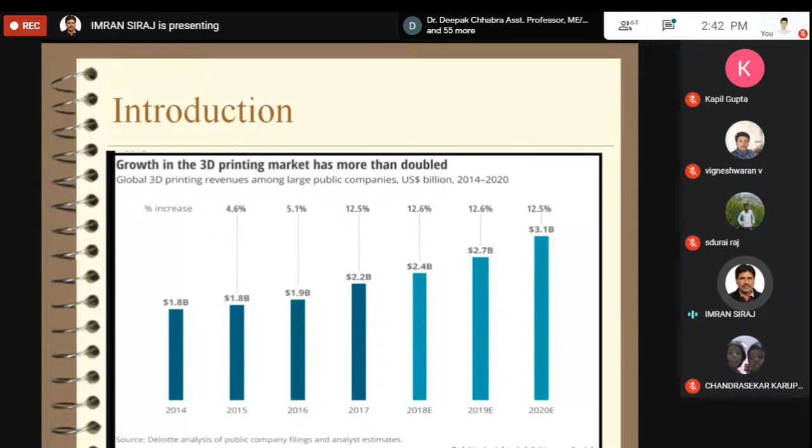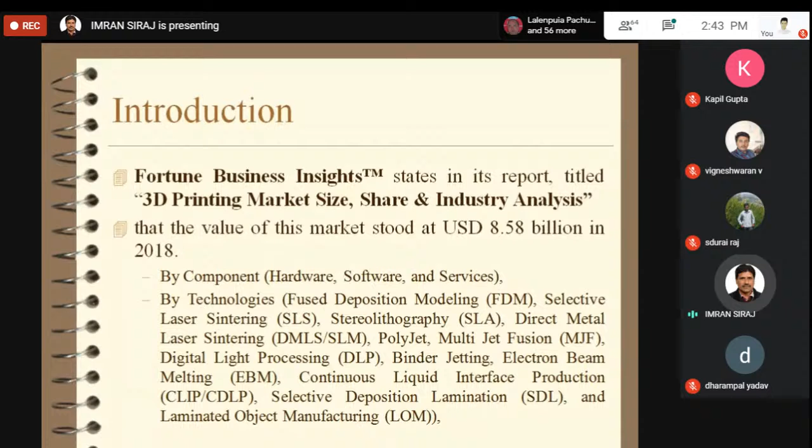Coming to some other reliable sources, another 3D printing market outlook. The predictions are for the next 5 years. We started from 1.8 billion in the year 2014, and now in 2020, by the next 5 years we are expected to reach 8.58 billion US dollars. The whole market scenario would be close to $8.58 billion. This was 3D printing market size, share, and industry analysis, Fortune Business Insights trademark report. They are a giant in this field, and their reports are very reliable and close to reality.

So they are also saying that 8.58 billion is the market value, and by the year 2025, we would be having around $44,393.1 million. That is, we are predicting by the year 2025, we would have this much amount involved for all 3D printing activities. They also told that North America was the highest contributor to the global 3D printing market, with a net worth of $1,728.1 million in 2014, estimated to reach $16,838.3 million within 5 years, registering a compounded annual growth rate of 20.8% during the forecast period.

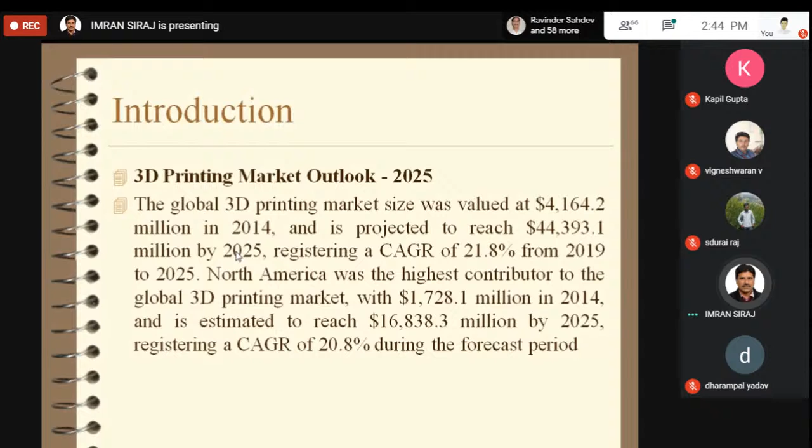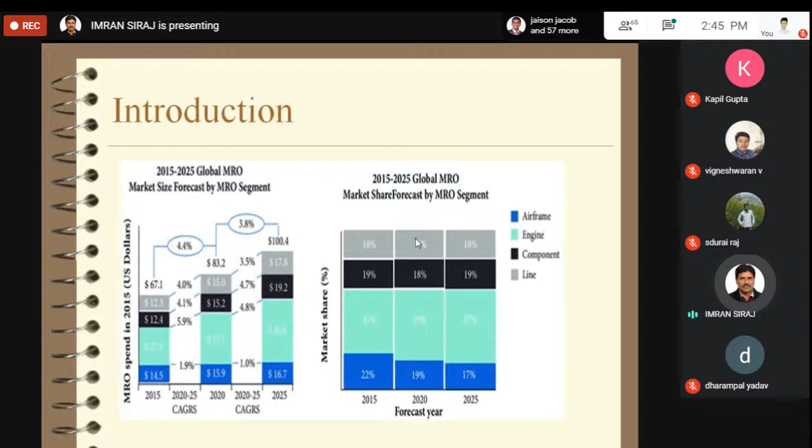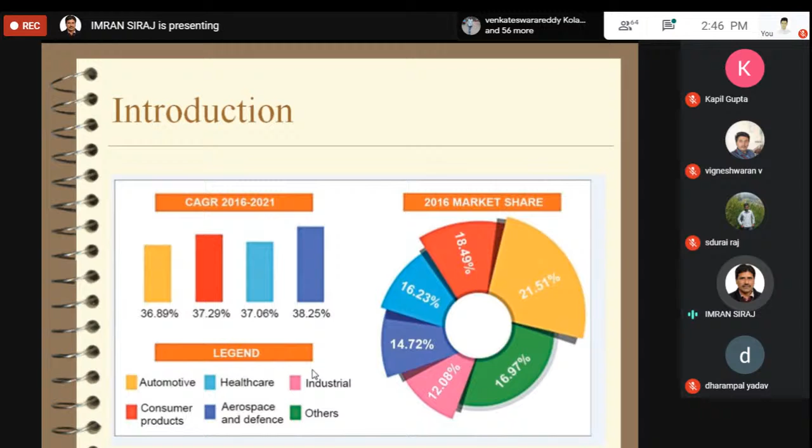Then we have compounded annual growth rate between 2016 to 2021. This is the cumulative compounded growth rate: 36%, 36.89 to 37.29, 37.06, and 38.25. And this is the market share: 12.08%, 14.7%, 16.23%, 18.49%, 21.5%, and 16.9%, for automotive, consumer products, healthcare, aerospace and defense, industrial, and other. I would like to mention this data: 12.08 for the industrial sector. The application of 3D printing in the industrial sector is quite low, which I'll be discussing today.

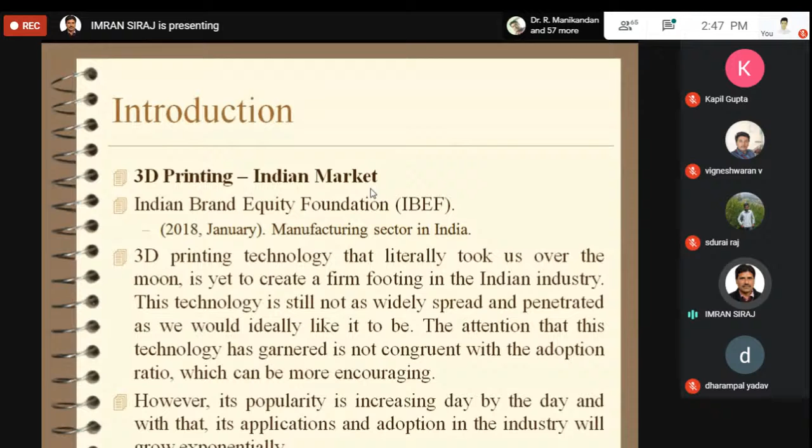Coming to the Indian context, we have the Indian Brand Equity Foundation, IBEF, and in their report published in 2018, they discussed the manufacturing sector in India. They said that 3D printing technology, which literally took us over the moon, is yet to create a firm footing in Indian industry. This technology is still not as widely spread and penetrated as we would ideally like it to be. The attention this technology has garnered is not congruent with the adoption ratio, which could be more encouraging. However, its popularity is increasing day by day, and with that, its application and adoption in industry will grow exponentially. This is from the Indian Brand Equity Foundation, the most reliable source for financial inclusion and calculations as far as the Indian market is concerned.

Now, another research analysis wing, 6W Research, also concerned with the financial status of all sectors in India, has indicated in their report that by 2021, the 3D printing market in India is estimated to touch $79 million, with focus on optimizing cost and quality of production, shorter development cycle times, and adopting engineering and manufacturing approaches. 6W Research has also indicated that 3D printing is yet to become a natural choice for industries to invest in to retain their competitive edge. I have highlighted this whole sentence, and it is going to be the pretext of my talk: 3D printing is yet to become a natural choice for industry to invest in to retain their competitive edge. This will increase the penetration of this technology across various industry verticals.

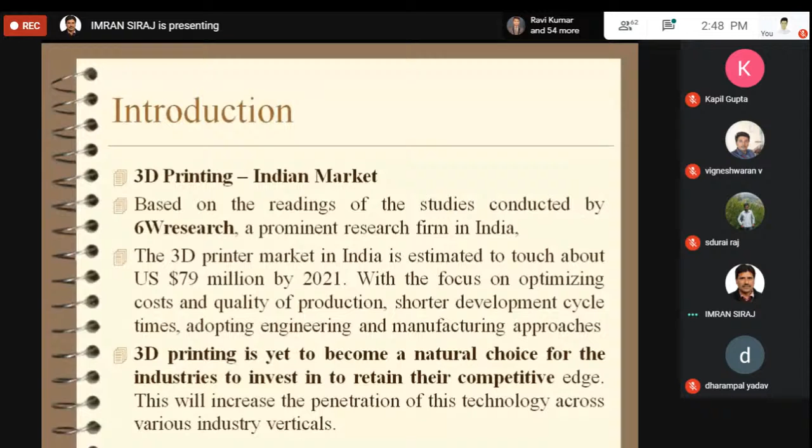Currently, the use of 3D printing in India is restricted to conventional applications such as prototyping for visualization and validation in industries such as consumer products, automotives, and aerospace. However, with greater awareness of the technology and its benefits, it is now being considered for use as an alternative technique for customized small batch productions and manufacturing tools.

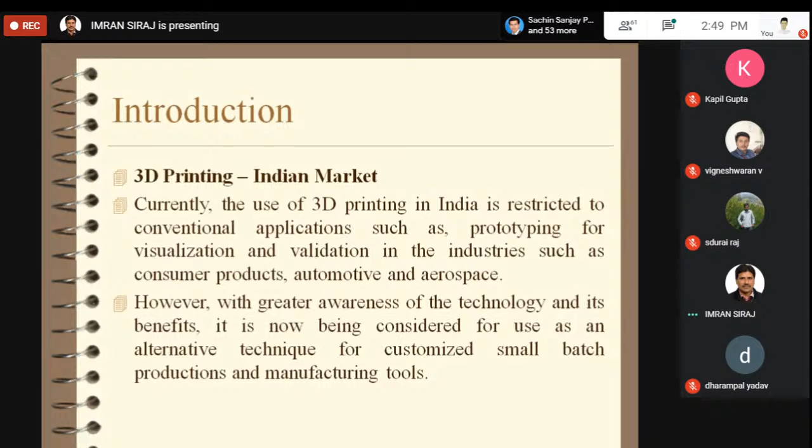Let's talk more about the introduction, then we'll come to the final body. As far as the Indian market is concerned, 3D printing is presently being widely used by the medical industry in India. However, the advantages of using this technology in other fields cannot be ignored nor overlooked. They are apparent and imperative. 3D printed parts are robust in strength, faster to develop and easier to modify as the technology becomes affordable.

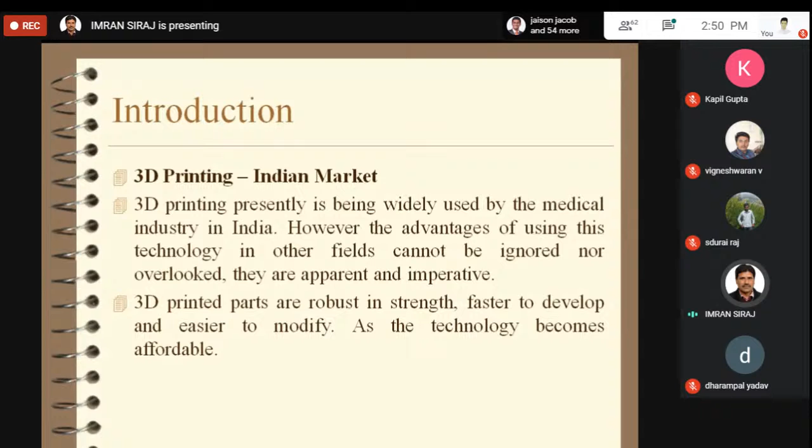The medical devices industry has largely adopted 3D printing to lower their cost of product design and development, while still building reliable devices. However, the medical community consisting of doctors and paramedicals has not yet come forward to use it for developing implants or for mock surgeries, etc. It is a proven technology of which the Indian medical community has started taking cognizance, and we will soon see this becoming a vital part of their decision-making process.

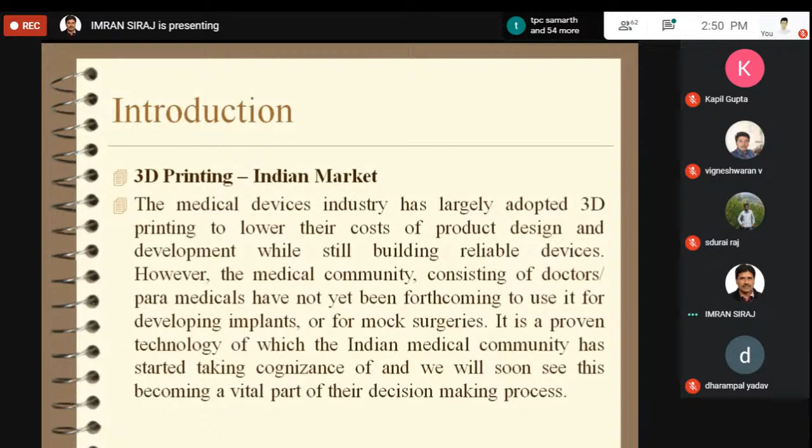3D printing in India will further pave its entry into other segments such as arts and design, interior decorations, fashion accessories, footwear designs, jewelry designs, animation and gaming, furniture, and many more.

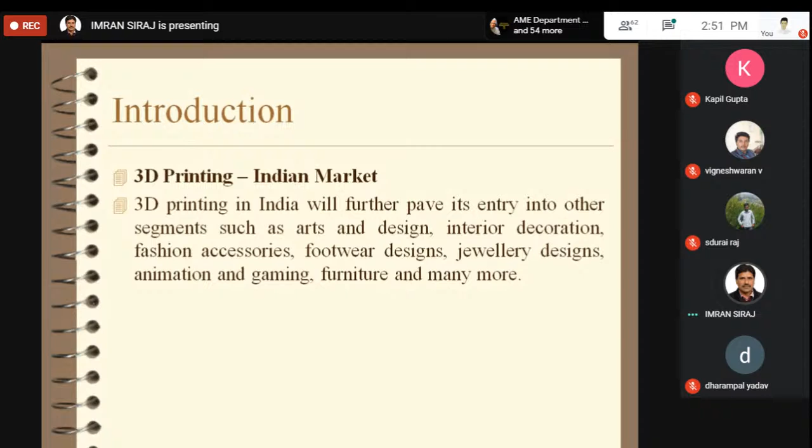In India, the market for 3D printers is still at a nascent stage. However, it offers huge growth opportunities in the coming years. With initiatives like Make in India, the domestic manufacturing sector is being encouraged. This will automatically play a pivotal role in the growth of the local 3D printing industry.

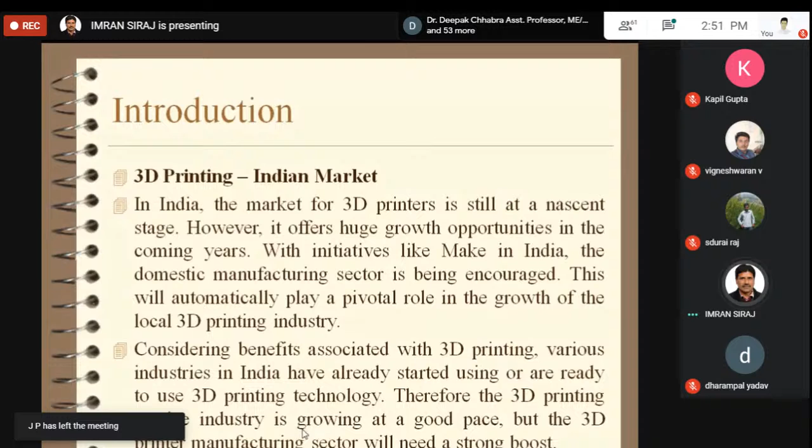Considering the benefits associated with 3D printing, various industries in India have already started using or are ready to use 3D printing technology. Therefore, the 3D printing service industry is growing at a good pace, but the 3D printer manufacturing sector will need a strong boost.

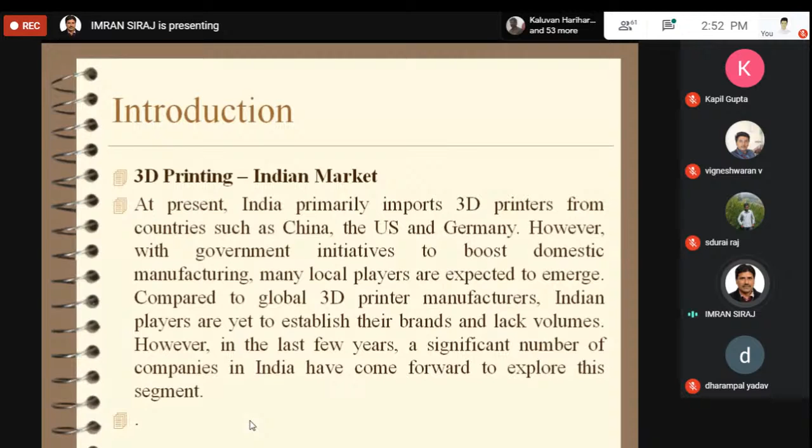At present, India primarily imports 3D printers from countries such as China, the US, and Germany. However, with government initiatives to boost domestic manufacturing, many local players are expected to emerge compared to global 3D printer manufacturers. Indian players are yet to establish their brands and lack volumes. However, in the last few years, a significant number of companies in India have come forward to explore this segment.

Five years ago, there were almost no companies in this industry. This has now increased to 5 to 7 companies. People are getting easy access to 3D printers and printing technologies, and market expectations are high. This huge market opportunity is attributed to factors like ease of development of customized products, ability to reduce overall manufacturing cost, and government investment in 3D printing projects for the development and deployment of the technology.

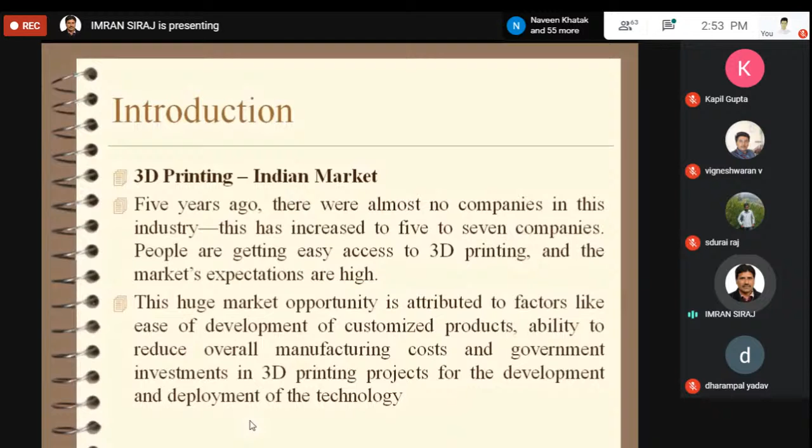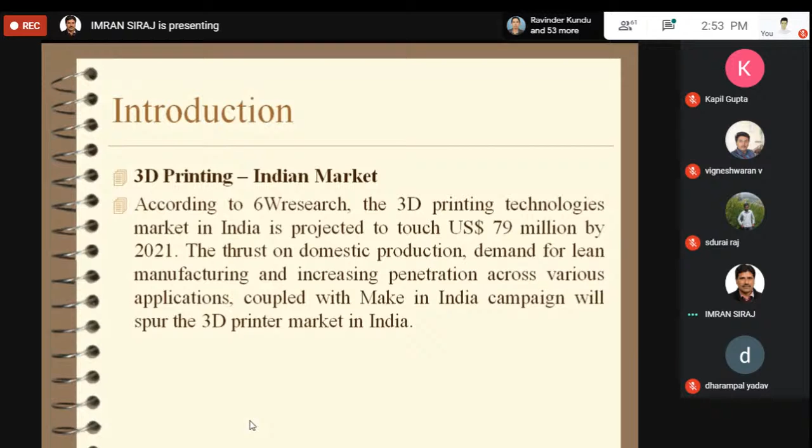According to 6W Research, the 3D printing technologies market in India is projected to touch $79 million by 2021. The thrust on domestic production, demand for lean manufacturing, and increasing penetration across various applications, coupled with the Make in India campaign, will spur the 3D printer market in India.

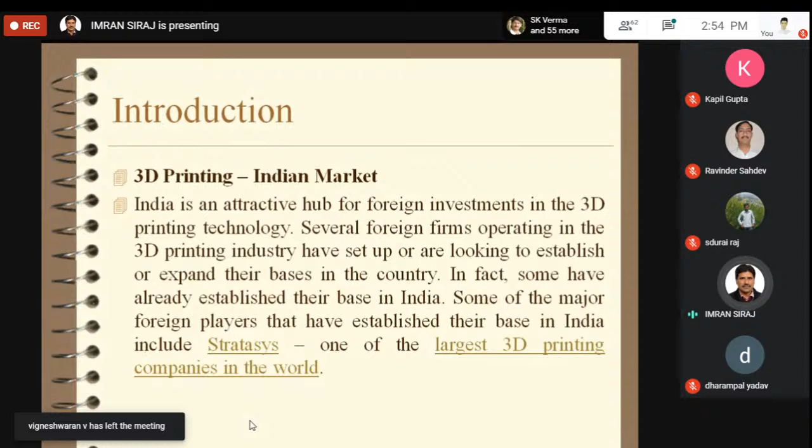India is an attractive hub for foreign investment in 3D printing technologies. Several foreign firms operating in the 3D printing industry have set up or are looking to establish or expand their bases in the country. In fact, some have already established their base in India. Some of the major foreign players that have established their base in India include Stratasys, one of the largest 3D printing companies in the world.

Other foreign players like Renishaw PLC, UK, are also within the reach of Indian buyers and Indian manufacturers. A global leader in the field of industrial 3D printing, EOS, has recently announced its expansion plans in India, announcing leadership movement and expansions in Asia Pacific.

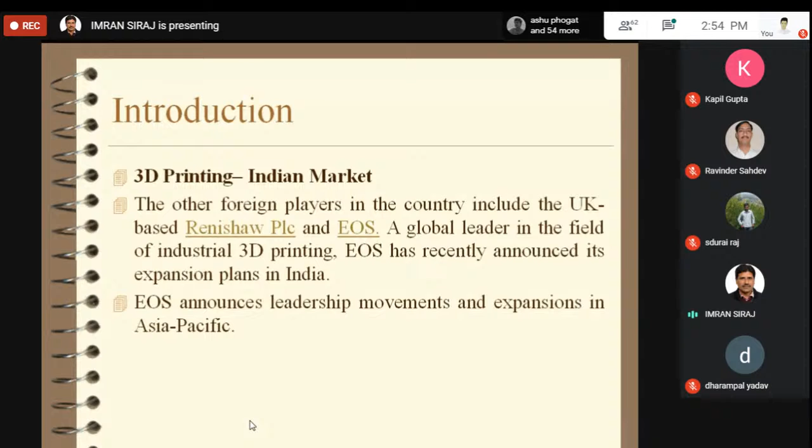3D printing in India is still emerging fast. However, the country's 3D printing industry is still at a nascent stage. When compared with other countries in North America and Europe, 3D printing in India will grow into a full-fledged industry only when the technology increases its share in the manufacturing sector. I have emboldened the manufacturing sector because today I will discuss the implications of 3D printing in the manufacturing sector and automobile sector.

The manufacturing sector of the country is one of the fastest growing sectors. In fact, it has a net worth of $311.6 billion in 2016-17, and it has the potential to reach a whopping $1 trillion by the year 2025. This is from the report of the Indian Brand Equity Foundation, IBEF, January 2018.

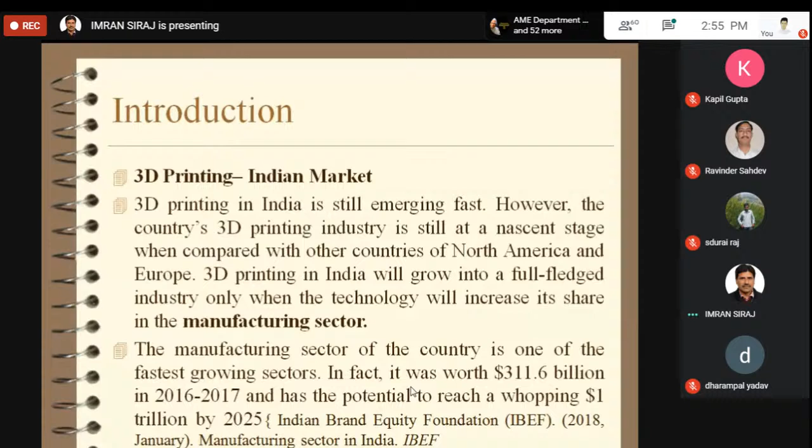3D printers offer huge cost and time reductions in certain industrial applications while providing better accuracy compared to conventional manufacturing processes. This helps SMEs, small and medium entrepreneurs, and startups reduce their cost of production, and enables large companies to make products cheaper, faster, and better.

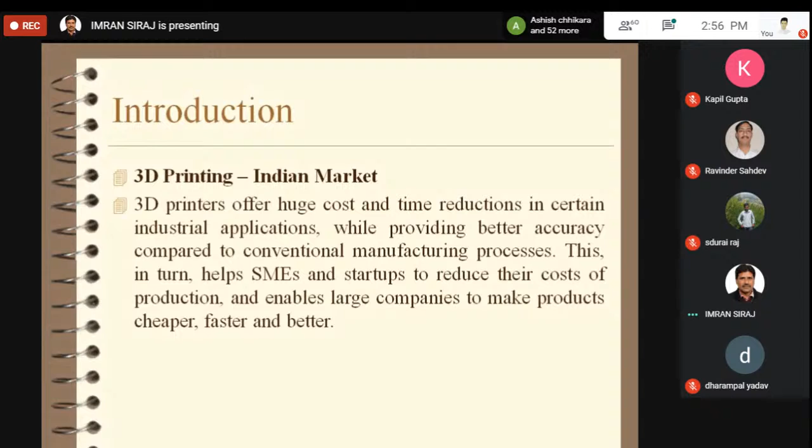With rapid advancement in material composition, such as the emerging use cases of polymers and metals, additive manufacturing is evolving from a prototyping tool to a functional part fabrication, with new materials, shorter lead times, and innovative finishes while adhering to standards like FDA, ASTM, and ISO. These are the main standards that control industries all over the world. FDA is the Food and Drug Administration body, ASTM is the American Society for Testing and Materials, and ISO is the International Organization of Standardization. These are the three main bodies that govern processes globally, enabling the technology to be integrated with manufacturing processes.

So this was all the goodness about the future prospects of 3D printing that we are going to see, the market share, the money involved, and other activities related to 3D printing. So the finance would come, and we'd see a huge rise in the market of 3D printing.

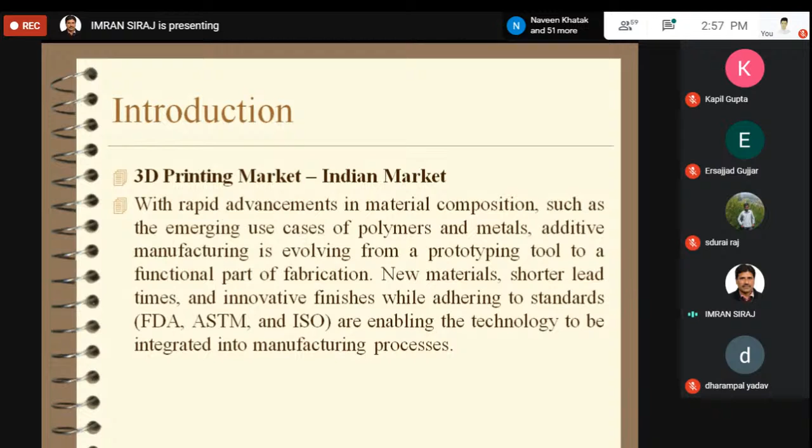Now we have to move a little earlier, so I would be moving to 2014. In 2014, there were many reports, financial analyses, and surveys. I have taken only 4, although there are many that I compared at that time, so I have compiled only 4.

One is Professional Global Incorporate US. They say in the year 2014 that the current financial evaluation of 3D printing is about $7.6 billion, and it would grow by a compounded annual growth rate of 20.4% by the year 2020. That means in 2014, all these predictions were about the year 2020.

They include Professional Global Incorporate, Grandview Research Incorporate, Deloitte Insight Global Research, and Orbis Research. These four are important financial institutions or analysts as far as global finance is concerned. All these predicted in 2014 that the 3D printing market would reach 7.6 billion, 8 to 11 billion, 2.7 to 3 billion, and 2.8 to 5 billion, with compounded annual growth rates of 20.4%, 20%, and 12.5% respectively.

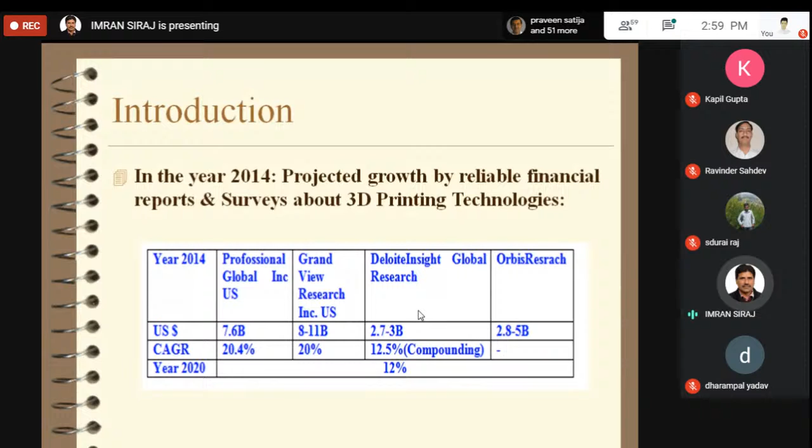But by the year 2020, when we again looked at all their reports, it was established that the compounded annual growth rate was only about 12%. So they predicted a huge CAGR, but it could not be achieved. This was the year 2014 prediction, and now we can say that by the end of 2020, it only achieved a 12% compound annual growth rate.

So my concern is, with these findings of this analysis, sir, there are points to consider.

Imran sir, your slide is not visible. Now visible, now visible. Again, after doing a full screen, it is not visible. Now visible. Sir, only the cursor is visible.

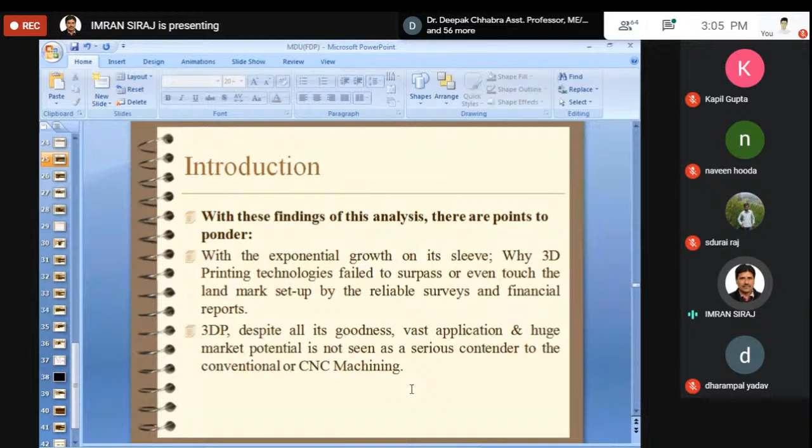So these are the points that we have to collectively think about, and we have to stand up and do a lot of research to find the answers to these queries. But many industry insiders say that 3D printing can't pose any threat to conventional machining as far as functional parts are concerned. That means a few industrialists have said that 3D printing is not capable of replacing conventional machining and CNC machining.

So as far as functional parts manufacturing is concerned, functional parts are components that are actually involved in some engineering functionality, like a dynamic system. It could be a gear, or a piston connecting rod, or a piston, anything.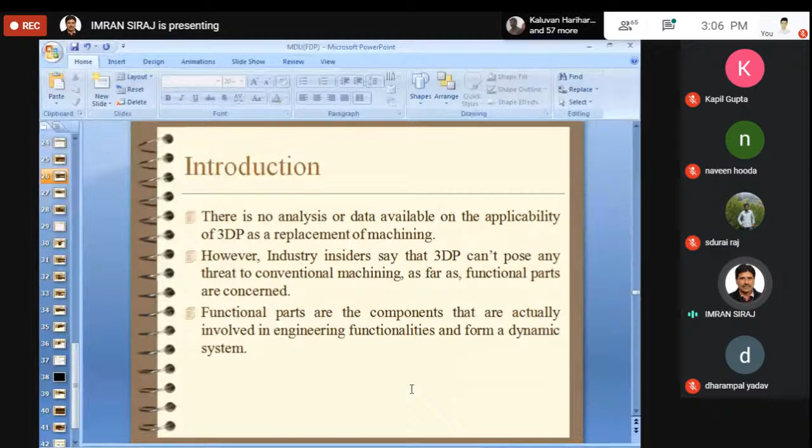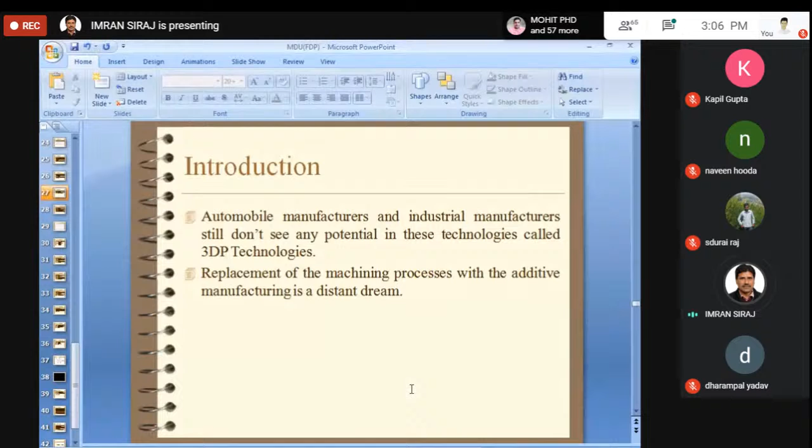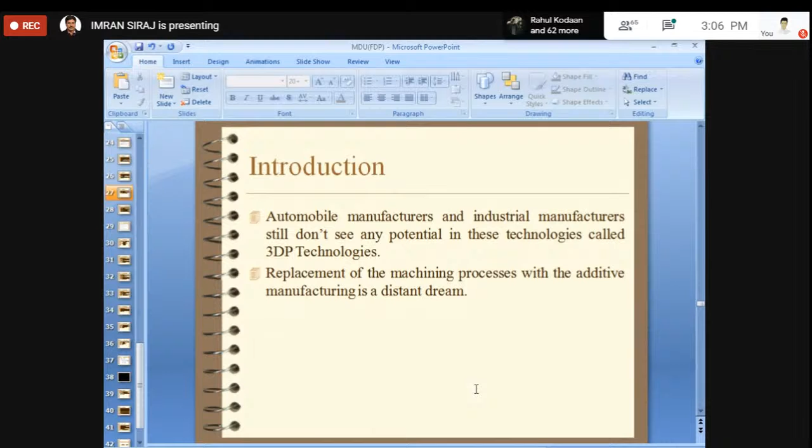Okay, so at the same time, automobile manufacturers and industrial manufacturers still don't see any potential in these technologies called 3D printing technologies. So this is the point that we have to think about. Why are these people, industrial manufacturers and automobile manufacturers, not taking any interest in 3D printing technologies? Replacement of machining processes with additive manufacturing is a distant dream.

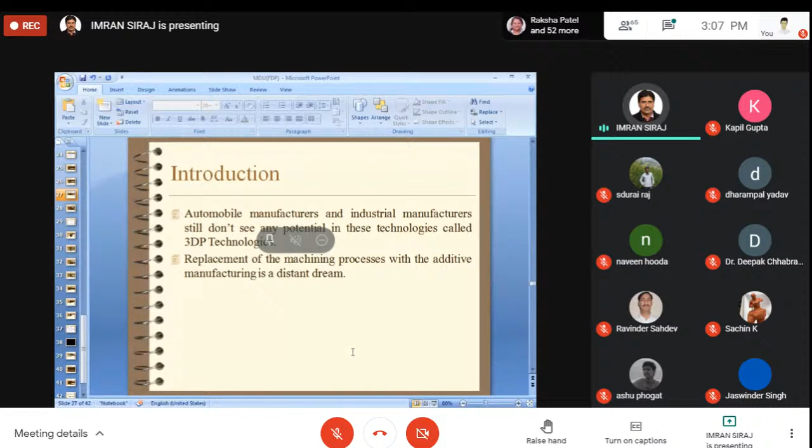So the conclusion of this 3D printing introduction is that replacement of machining processes with additive manufacturing is a distant dream. And this is the true reality beyond all the good things said about 3D printing. So now I would be discussing the two aspects I have shown.

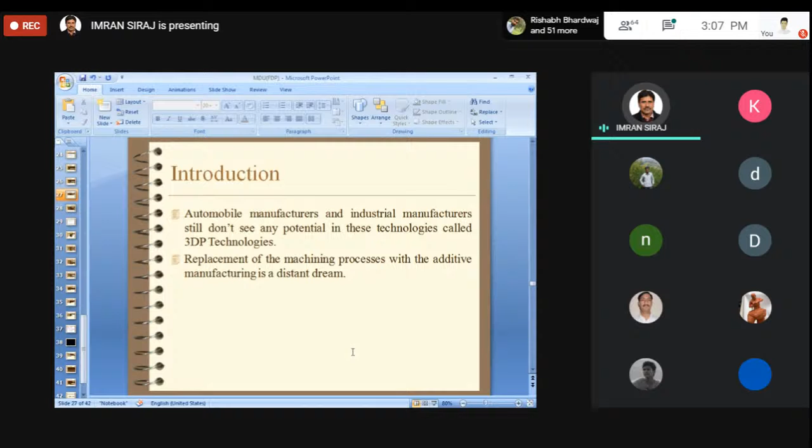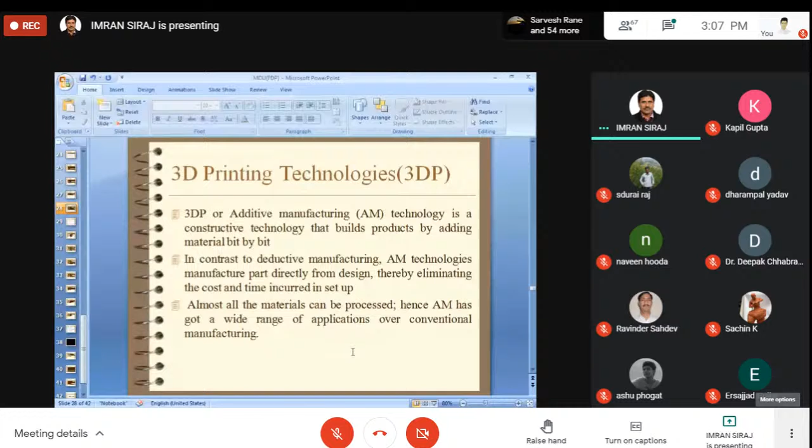One is the growth rate, the money involved, the finance involved, the technologies involved in 3D printing. But my concern is why manufacturers, industrial manufacturers and automobile manufacturers, have not taken this 3D printing technology seriously, and why these technologies failed to impress them and to replace conventional machining or CNC machining.

So I'll be coming to that later on, but before that, let me discuss 3D printing technologies. I will be discussing them only slightly, because since yesterday we have had a lot of talks about 3D printing technologies, and all the basic concepts have been cleared by the expert speakers. But this time I'd be giving a slight introduction to 3D printing technologies.

It is also called additive manufacturing technology, and in this technology, material is added bit by bit, in contrast to deductive manufacturing technologies. In deductive manufacturing technologies, we remove material bit by bit, like we do in a lathe machine, shaper or drilling machine. There we remove material bit by bit in the form of chips, and the final shape and size is achieved. But contrary to that, we add material in layers and make the final desired shape and size.

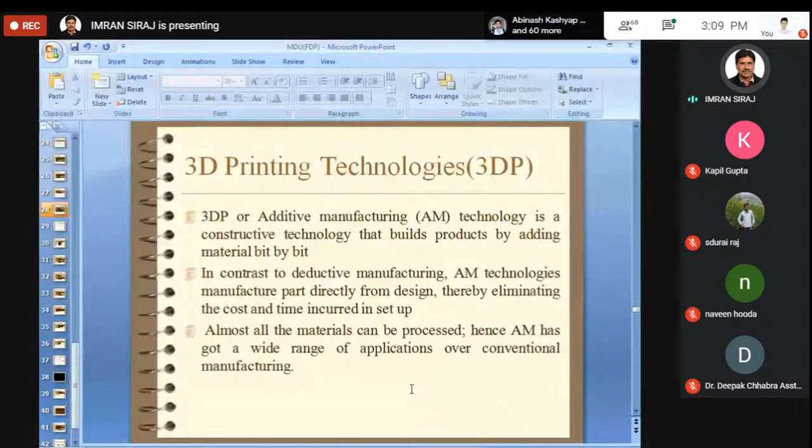The important thing is that all materials can be processed by 3D printing technologies. Hence, additive manufacturing has got a wide range of applications over conventional manufacturing. Almost all materials can be processed. This is the advantage of 3D printing, or additive manufacturing, that all materials can be processed, and hence it has a wide range of applications over conventional manufacturing. This is the diagram.

Okay, so in the jetting method, a certain jet is responsible for manufacturing of the product, whereas in the laser method, a laser is scanned, a laser is moved along the profile or path of the part that is to be made. And in the lamination method, like we do while making different types of hardboards, we put layer by layer by sticking certain glue or by adding certain binder between the layers.

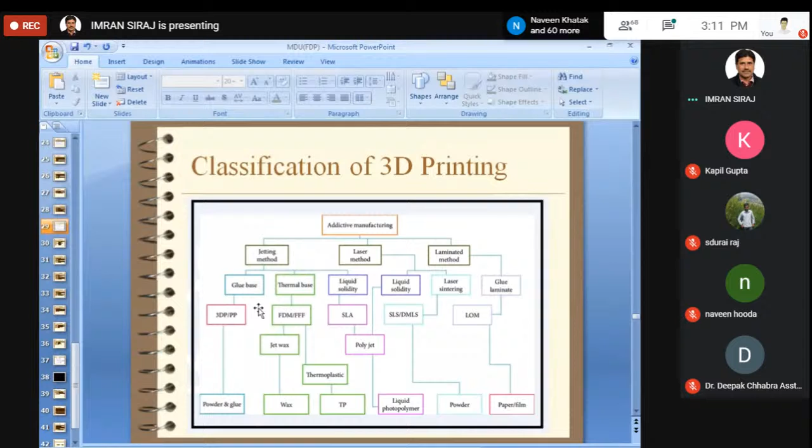Fused deposition modeling, or FFF, also called fused filament fabrication, then stereolithography, then SLS and DMLS, laminated object manufacturing, and this is the basic classification of 3D printing technologies.

Then the next section of my talk is on what process, on what standards the material is selected. Because in the starting of the talk I told that my focus is the core industry or industrial manufacturers or automobile manufacturers. So keeping track with this point of origin, we will be discussing the selection of material, how the material is selected for a particular part or a particular component.

So these are the mechanical properties, and based on these mechanical properties, we select a material. This is related with the basic design process that we have to understand first, and then only we'll be able to come later on to other discussions. Okay, so first thing is we have to find appropriate mechanical properties for our components or parts. First of all, we have to find a strength.

Strength is of two types: one is before fracture and the other is after fracture. Or we can say ultimate tensile strength, the maximum, before the peak and after the peak. So strength is of basic three types: compressive strength, shear strength, and tensile strength. Other types of strength are elastic strength, ultimate strength, and yield strength.

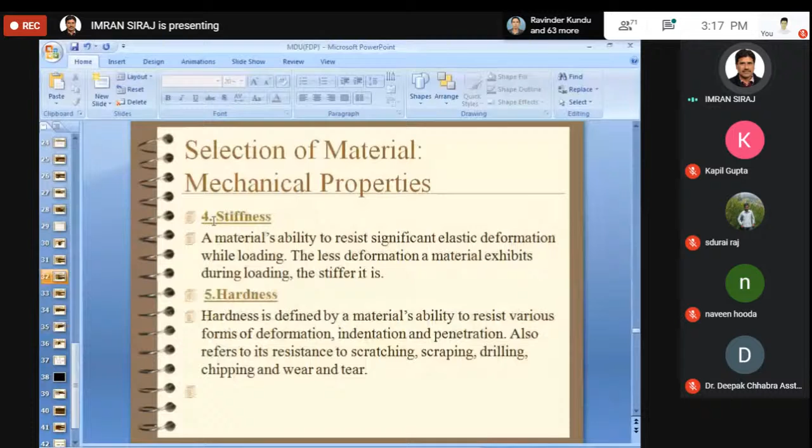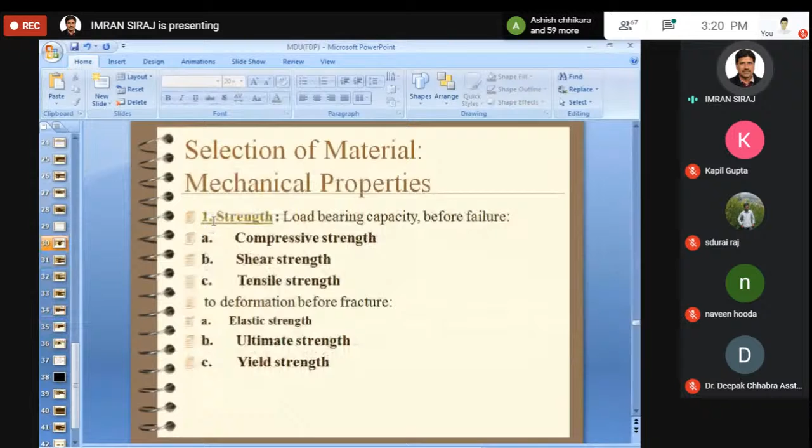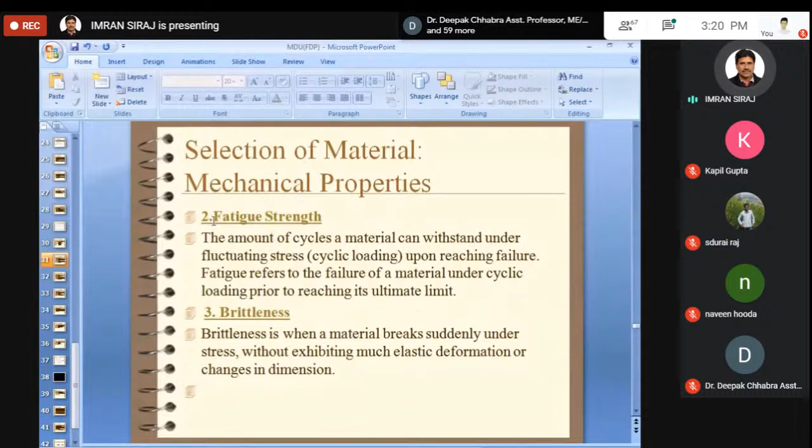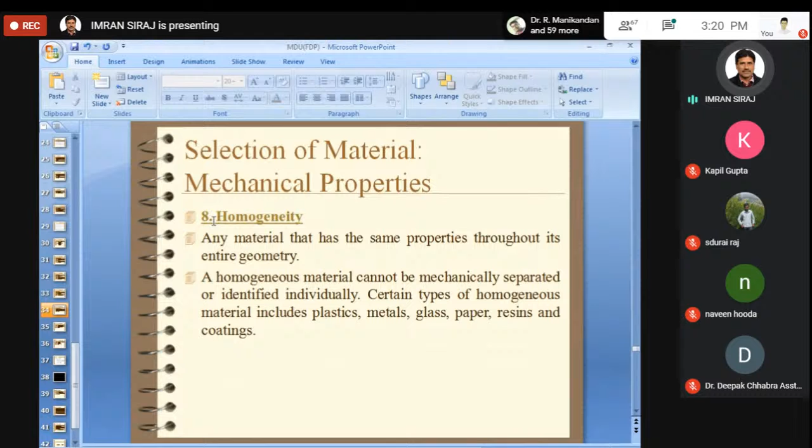As I told, what are the design expectations? These are the design expectations. We are expecting the strength, the fatigue strength or fatigue resistance, we are expecting the brittleness not to come over, we are expecting the stiffness, the hardness, the toughness, the resistance to embrittlement, the homogeneity. These are the properties that we are expecting from our process.

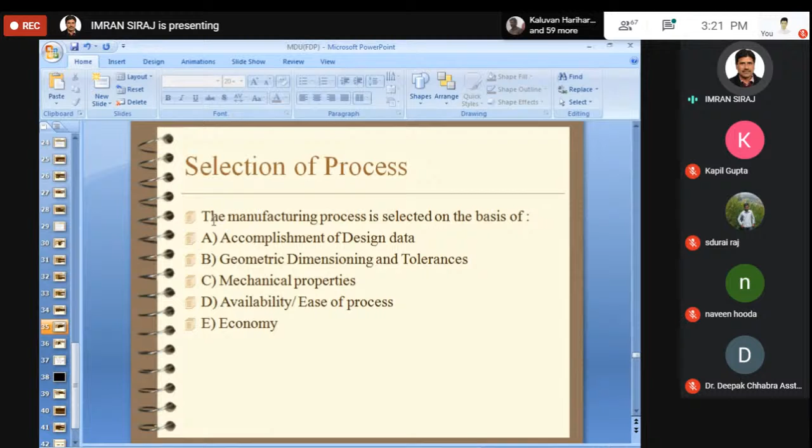So first thing is functionality. Mechanical properties, as we discussed, these are the mechanical properties. We are selecting a process on the basis that it provides us good mechanical properties, then availability of the process, and then economy. Okay, so we are coming to what the quality issues are.

Among the quality issues, first of all, the most important is functionality. We are not getting the design data from 3D printing technologies as expected. For example, you produce a part by 3D printing, and the same metal you process on a CNC lathe or CNC turning. The part produced by CNC technologies would give you more strength, more compatibility, and other relevant data.

Another is surface finish. Of course, 3D printing cannot match the surface finish provided by conventional machining and CNC machining. The third one is dimensional accuracy. This is also of utmost importance if we have to design a more precise and accurate part, but 3D printing technologies are not capable of providing as much dimensional accuracy as conventional and CNC machining. And the last one is the cost.

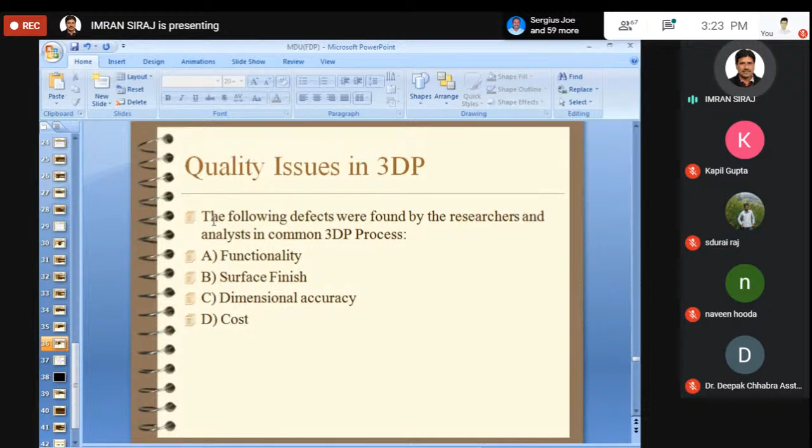Cost is the last one. 3D printing gives us a benefit on the D point. That means parts produced by 3D printing technologies have a lower cost compared to conventional machining. But the first three technical points would not let 3D printing come to core manufacturing. So these are the quality issues in 3D printing.

So we have to take all these factors and parameters into consideration while overcoming the quality issues in 3D printing, if we have to make it compatible with modern industry, core manufacturers, and the automobile sector. So we have to take all these points into consideration.

I hope new researchers joining this FDP will focus on the core sector, specifically automobile manufacturers and machine manufacturers, to overcome these problems, so that the 3D printing process takes its share of modern technologies and its share in core manufacturing also. So these are the quality issues and their causes.

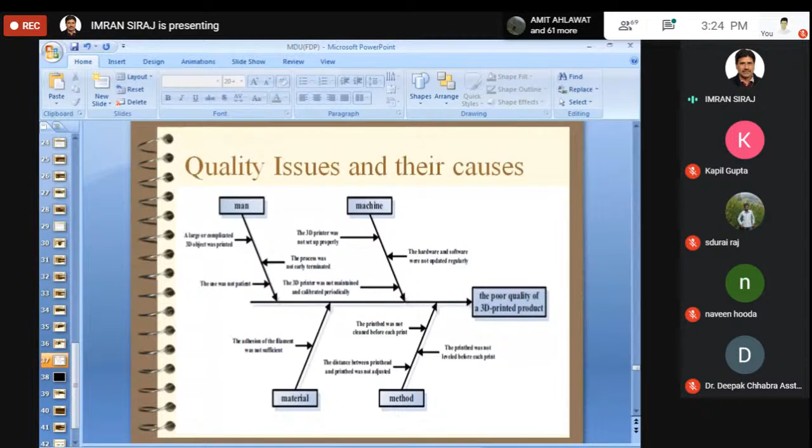So the conclusion of this talk is that 3D printing has good market scope in India. It has huge potential in every sector of manufacturing, but it is not being applied in the core manufacturing sector. It is established by now that 3D printing is not being applied in core manufacturing, and the reason is poor mechanical properties of the metal 3D printed part.

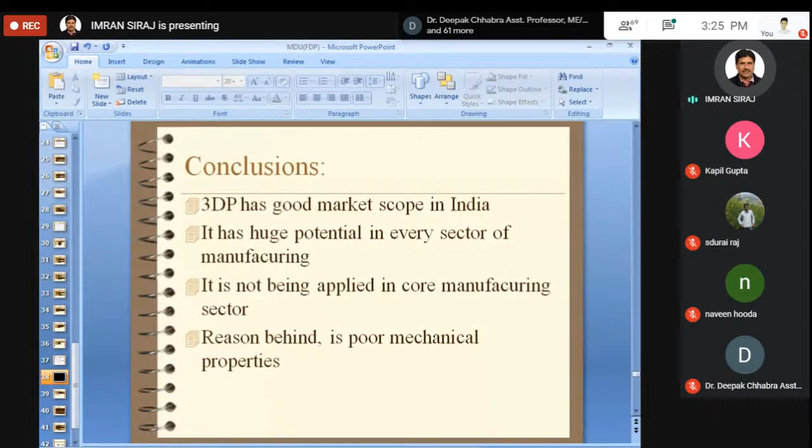So this is the conclusion of this talk, and also the other points are inaccurate dimensioning, so precise research is required. Young researchers will come forward to look into this aspect, because in other fields a number of researchers are working and analyzing deeply, but few people are working in the core sector and core mechanical manufacturing systems. So what are the causes, why these causes occur, and how these causes can be prevented, and how 3D manufacturing can be implemented in the core manufacturing sector also.

We also have to establish a functional relationship between process parameters and performance measures, because everything is related to the process parameter. Process parameters are the inputs given at the time of manufacturing, and hence any slight wrong feed given to the process parameter would lead to bad quality products. So a lot of research is being done in this area, and a number of researchers are working on it.

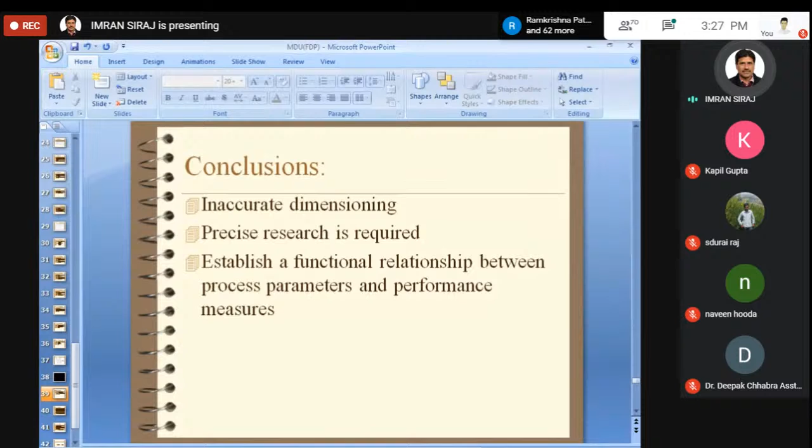At the same time, I would request researchers joining here to explore the applicability of 3D printing in the core sector and manufacturing sector. I hope I have motivated you and given the correct idea of research as far as the core sector is concerned.

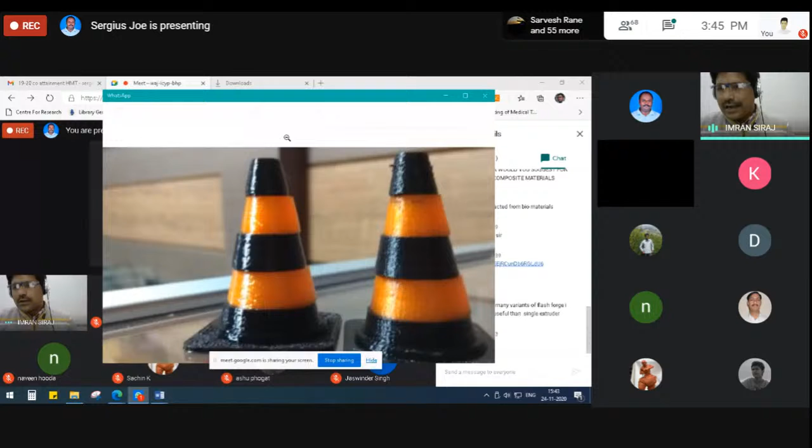Okay, can you see the image actually? I could not see it. You have shared it? Yeah, I have shared my screen, sir. No, first of all, let me stop. Just a moment. Yes, yes, I can see it now.

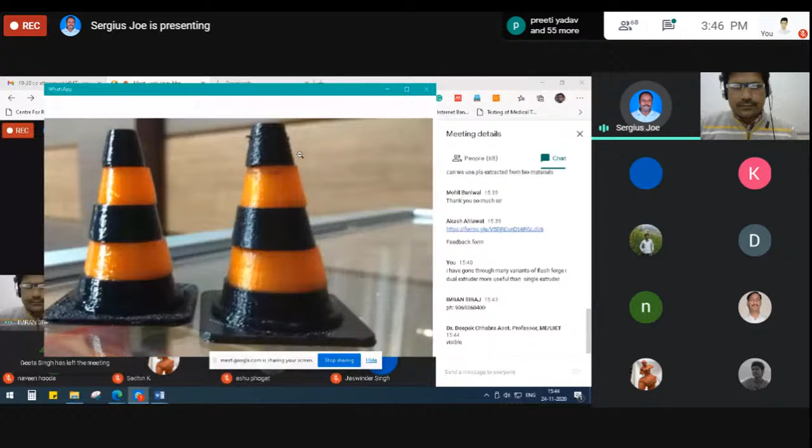So we are using two colors actually of PLA materials. But with the second extruder, he said that from the very beginning of the printing itself, it went on offsetting. So he complained to the seller, but the seller was just giving an instruction that this is a problem of dual extruders that cannot be rectified. So is it so, or is there something else the seller is hiding from us?

Actually, there is crucial leveling required for these printers. The problem is that we have to level precisely, within a 15 to 50 micron range. So what I think is there could be a leveling problem, and there could be two types of problems: one horizontal and one vertical, because the two extruders may not be moving at the same angle. So you have to check the leveling, and for me, it's only because of the leveling that this kind of problem occurs.

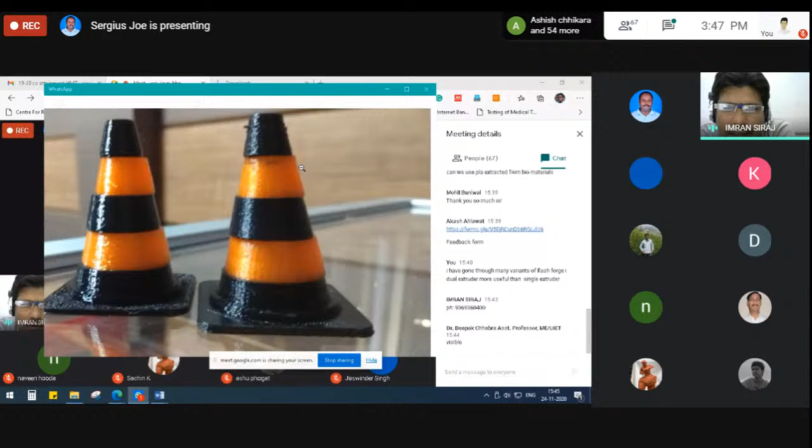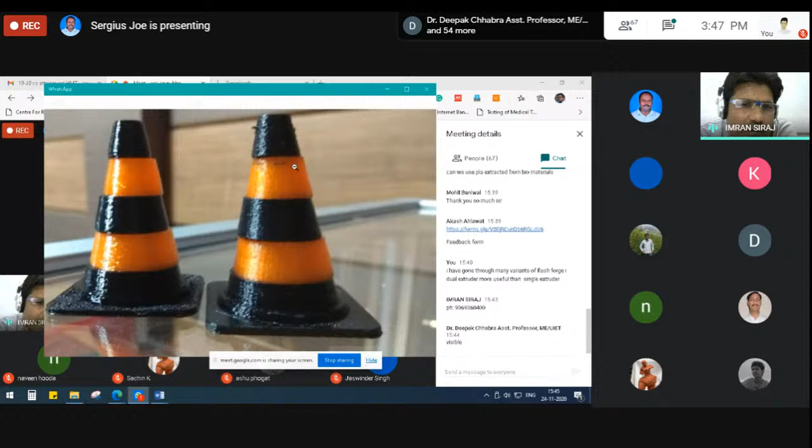There's no other issue—they are offsetting and there's no match in the exterior shapes of the two colored produced parts. I don't suppose there's any other problem. They are very good printers and will stick together at a precision level. So you have to check the levels in both horizontal and vertical cases. Okay, sir. Okay, okay.

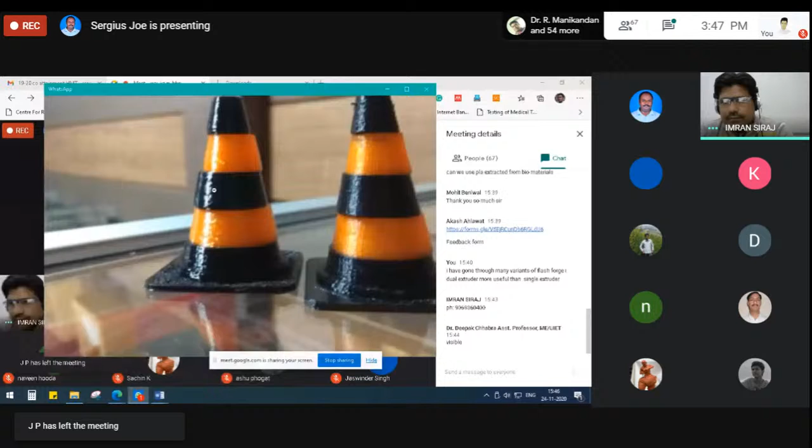How can we make waste materials like plastics and other materials to be used again as filament? By that I mean, what processes? Actually, Ashu, we have two types of plastics: thermosetting plastics and thermoplastics. Thermosetting plastics are non-reusable, whereas thermoplastics can be reused. The whole problem right now is that we cannot completely decompose the plastics that are not reusable. There are many technologies working on it, and let's see what exactly comes out.

So once we are capable of recycling the thermosetting plastics, we would be able to reuse it as filament. How can we make waste materials like plastics, any material, to be used again as filament? By that I mean the processes involved. Ashu, is that clear? I hope I have answered your question.